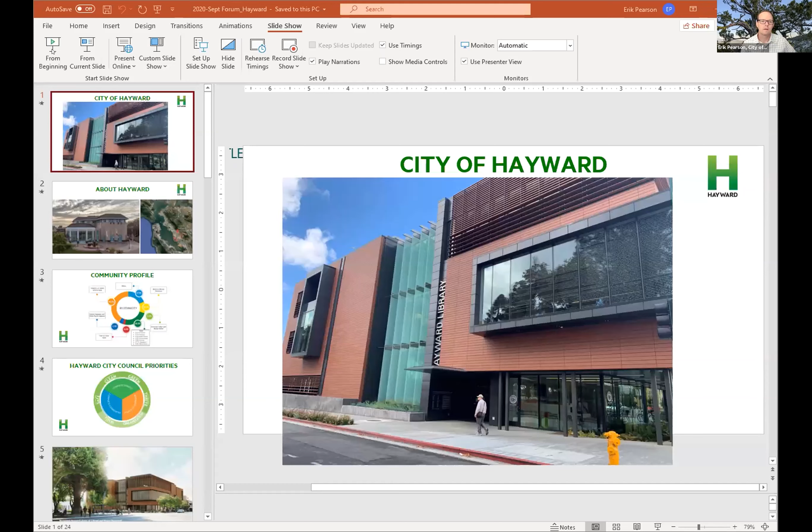I'm going to talk a little bit about Hayward's ZNE policies and some projects we've implemented in the last few years. In case you're not familiar with Hayward, we're located in the East Bay. We're the 6th largest city in the Bay Area with a population of about 160,000. We have a large industrial sector, and we are home to CSU East Bay and Chabot Community College. We are very diverse, with more than 40% Hispanic or Latino, also a large Filipino population.

For many years, our council has been very supportive of sustainability. Safe, clean, and green have been top priorities for more than 10 years. In 2007, our mayor established our City Council Sustainability Committee, and that's about when we started developing our first climate action plan. In 2014, we updated our CAP and incorporated it into the general plan. This year, we updated our greenhouse gas emission reduction targets to include a target for 2030 and a carbon neutrality goal for 2045. So we'll be updating that CAP to address those new goals.

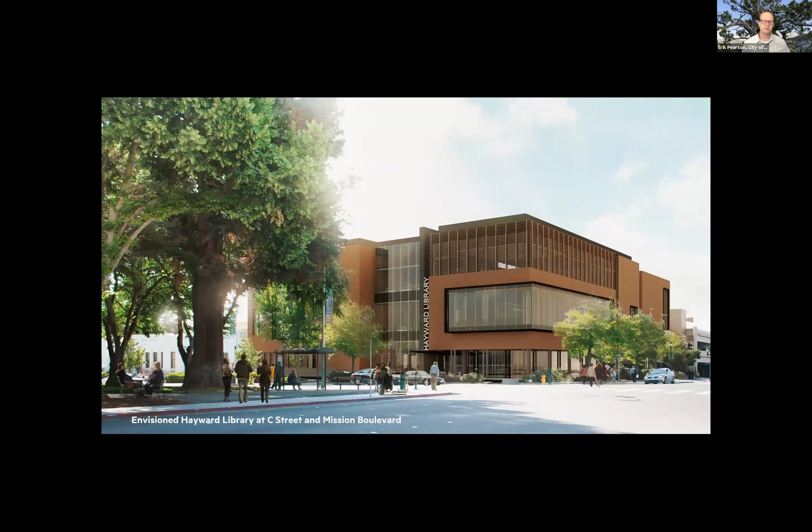So in 2013, we started planning the town library. The initial plan was simply to meet the city ordinance, which was to have a LEED silver building. But before too long, we realized that ZNE was possible, and our city council directed us to go for it.

We achieved ZNE by incorporating additional energy efficiency, lots of extra insulation, as well as operable windows on the building. And we put solar on the roof of the library as well as on top of the adjacent parking structure.

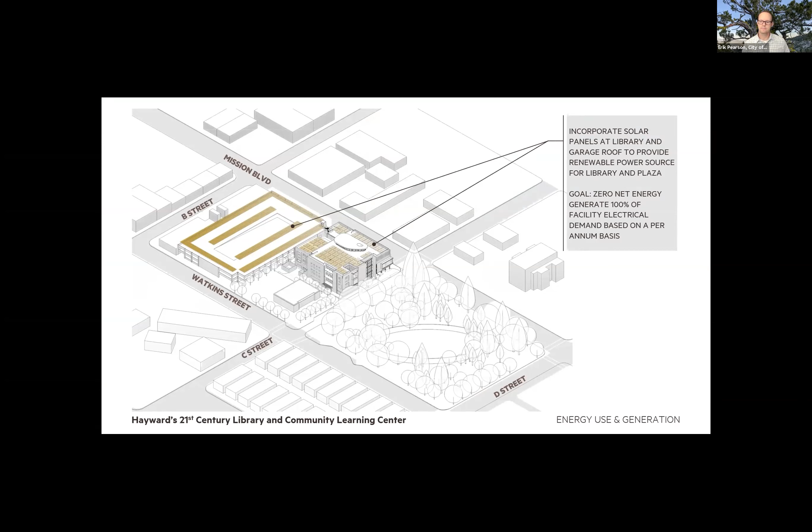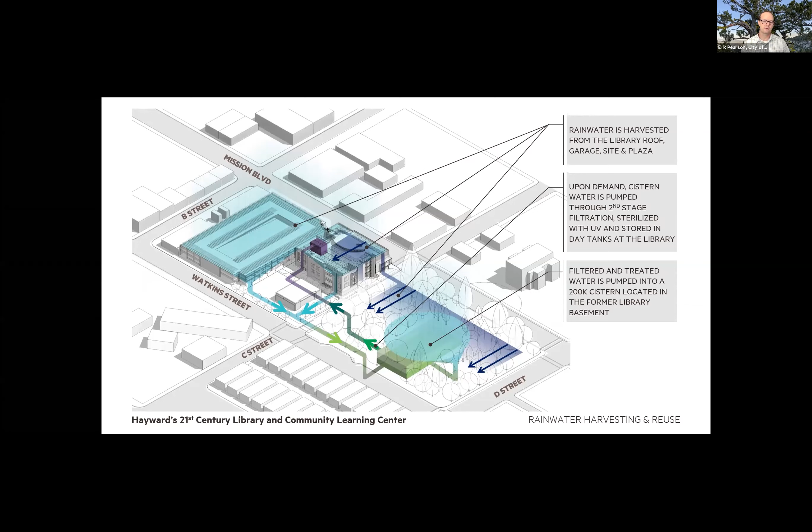Another cool feature of the library is a rain catchment system. Now this isn't necessarily related to ZNE, but it's worth mentioning. We were able to use the basement of the old library across the street to capture water from both the building, the parking structure, and the park. That water will be filtered and pumped back for non-potable uses in the library. Here's a picture showing the installation of some weight-bearing plastic blocks in the old basement.

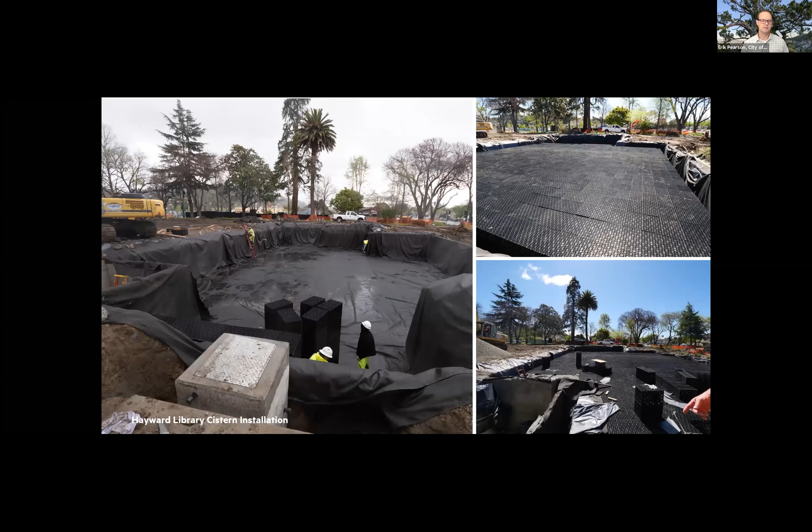So in the fall of 2015, we started construction on the all-electric ZNE library. There was lots of excitement, and at this time our sustainability committee asked us to develop a policy that would require all future city buildings to be ZNE.

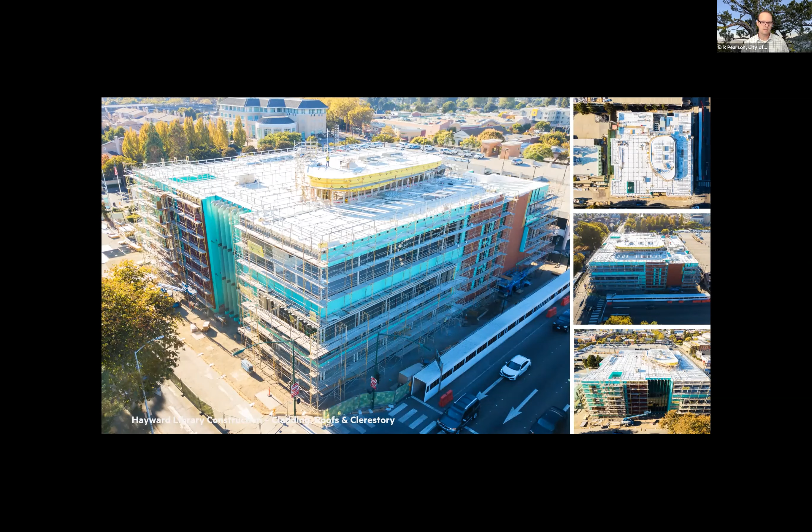So we brought a recommendation to the sustainability committee to follow the state's lead and apply this standard to any buildings starting in 2025. The committee's response was, well, why do we need to wait till then? Let's get going right away.

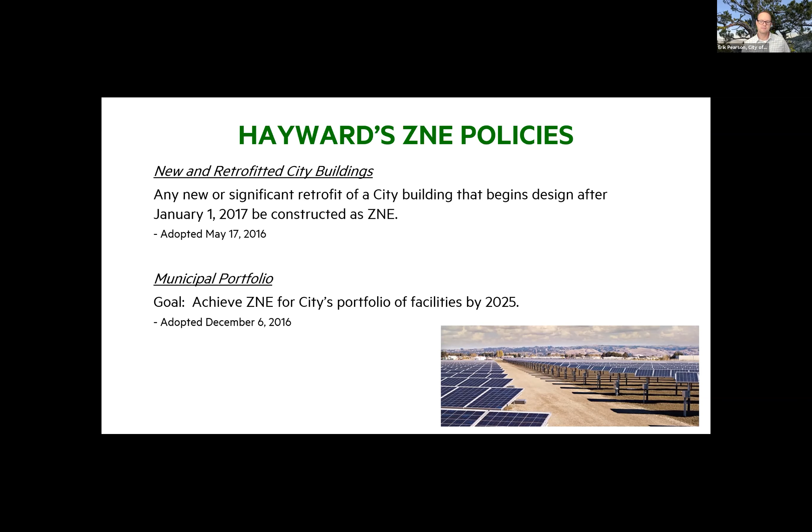So in May of 2016, our council adopted this policy that all new city buildings will be ZNE, and all retrofits of existing buildings that exceed 50% of the building's value will be ZNE. This was to apply to any building that started design after January 2017. Then in December of 2016, our council adopted another goal to achieve ZNE across our portfolio of city facilities by 2025.

So then our library was nearing completion. I'm going to talk a little bit about how we're doing on the overall ZNE goal.

We've been producing renewable energy at our city facilities since the 80s. We had a cogeneration system since 1982, then replaced it in 2015 with one that uses biogas to create electricity. We also have rooftop solar on several other facilities, including our corporation yard and fire stations.

And then we have solar at the water pollution control facility. The first 1 megawatt system was installed in 2010, and earlier this year we added another 600 kilowatts.

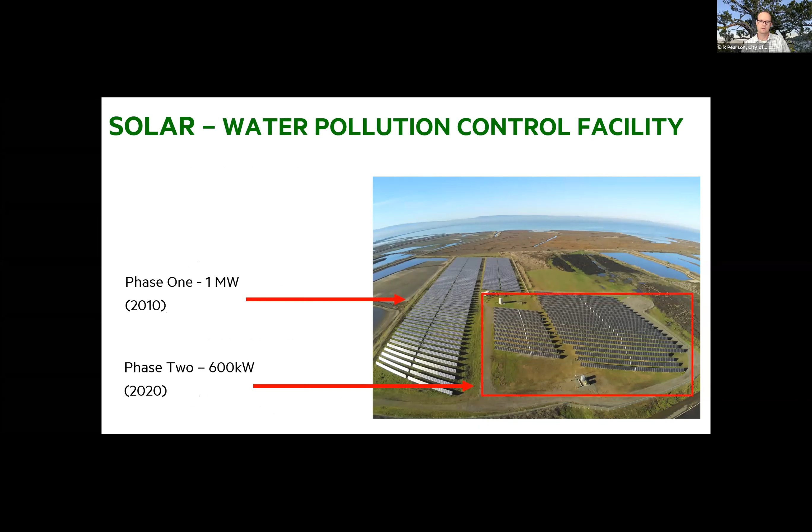This shows how we're doing across our entire portfolio, taking into consideration both natural gas and electricity. As of last year, 2019, we were generating about 65% of our total energy demand and about 80% of our total electricity needs.

Hayward is a member of the EPA's Green Power Partnership, and as of January this year, we were ranked number 28 on their list of the top 30 green power producers for on-site generation.

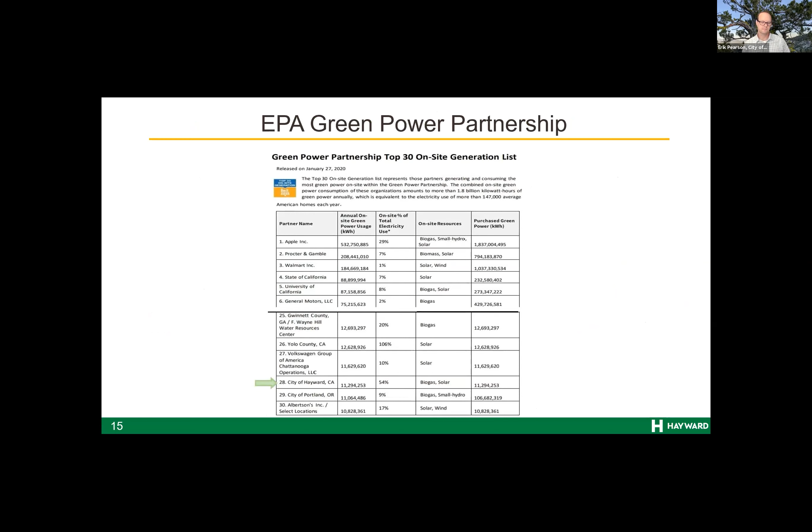Some new ZNE projects that we have in the works: we have a new fire station and training center that just broke ground. This will be a ZNE project.

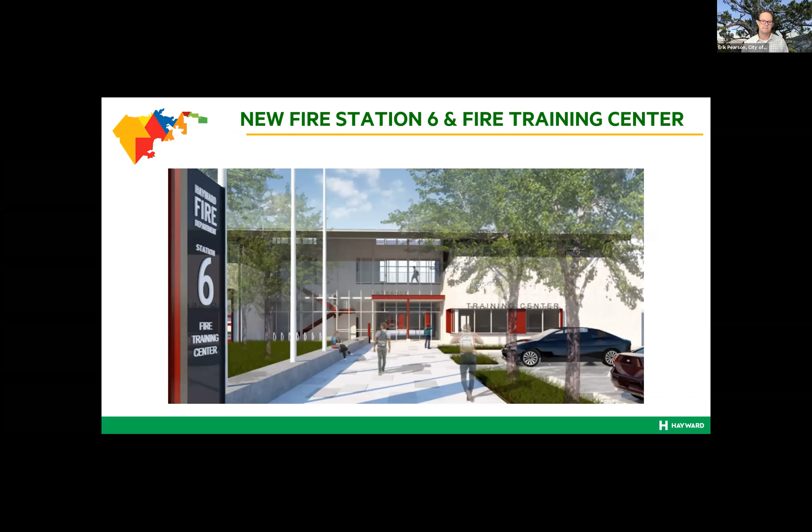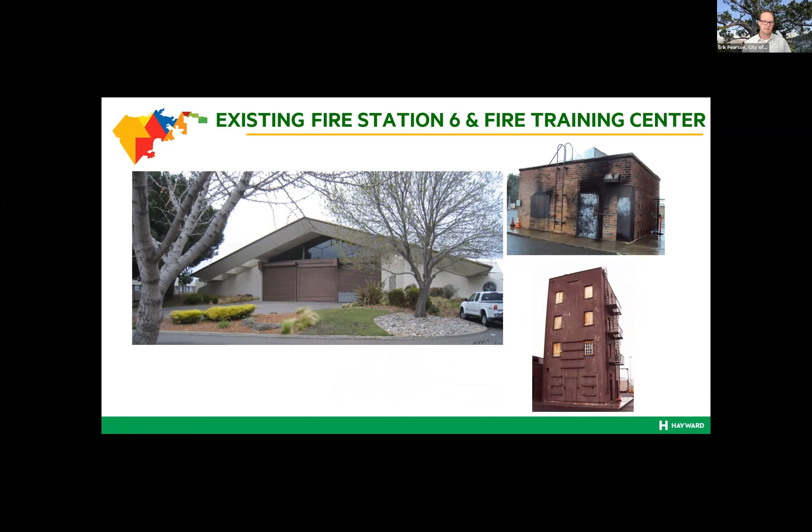The existing training center is a collection of old buildings developed over the last 40 years, including a training tower, storage buildings, and a burn building. This facility is adjacent to the Hayward Executive Airport, so it also houses our aircraft rescue unit, and it will have a BART car on an elevated platform for rescue simulations. This training center also includes a partnership with Chabot Community College for their fire science program.

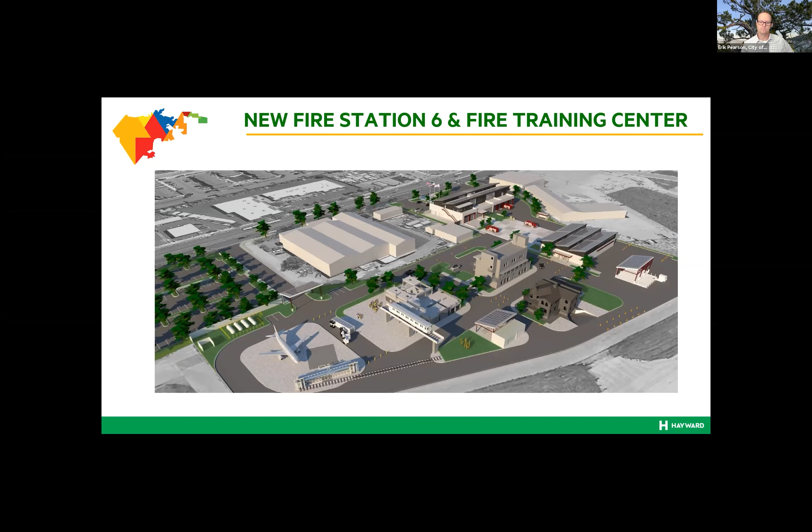Several of the buildings will have solar. The only gas to the site will be for a gas range. Unfortunately, the building permit went through prior to adoption of our REACH code, but the project will have sufficient solar to offset that gas use.

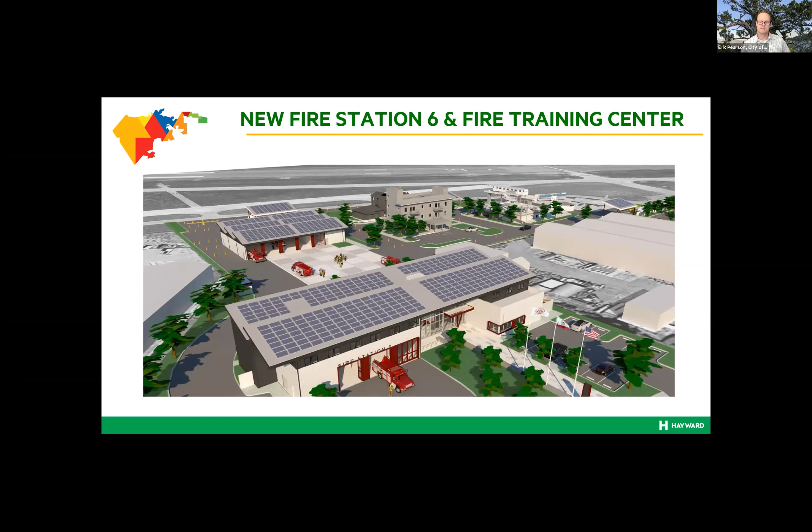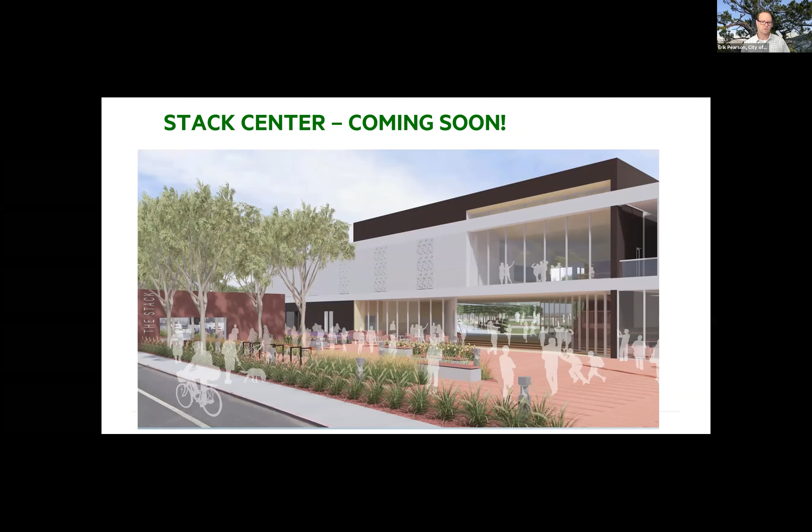Another project currently in design is a new community center. This will replace the existing Eden Youth and Family Center in South Hayward, currently housed in an old elementary school. The new building will include a health center, counseling, tutoring, and this project will be ZNE.

Finally, to address some of those missed opportunities we've talked about, our council in January this year adopted a 3-year strategic plan with a variety of projects identified. One of those is to prepare a plan to facilitate the transition of natural gas appliances to electric in city facilities. That's one of the next projects on our to-do list.